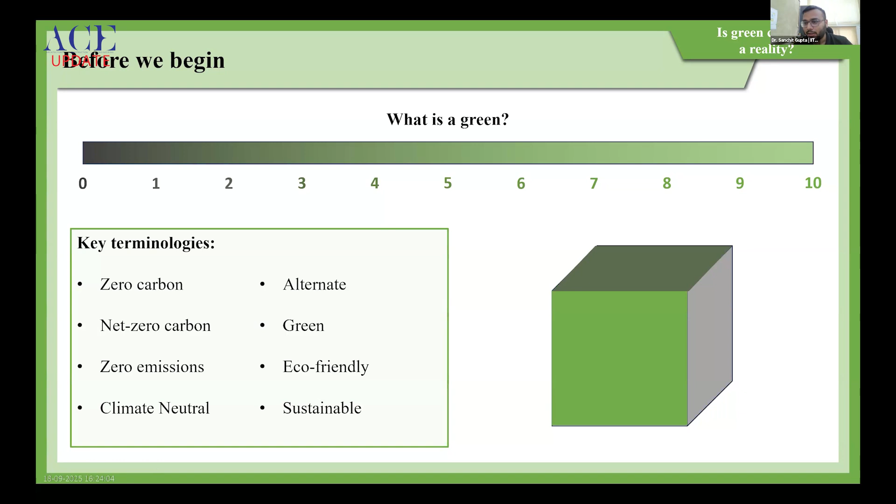comes perspective. If we are looking at a cube, it all depends from which angle we are looking at the solution. AAC block, which sir just talked about, is a sustainable solution when we are talking about walls. But when we are talking about load bearing structures, AAC cannot bear load, so it's not even a viable solution in those applications. So only within the defined application can we talk about whether the material is becoming green or not. About recycled aggregate.

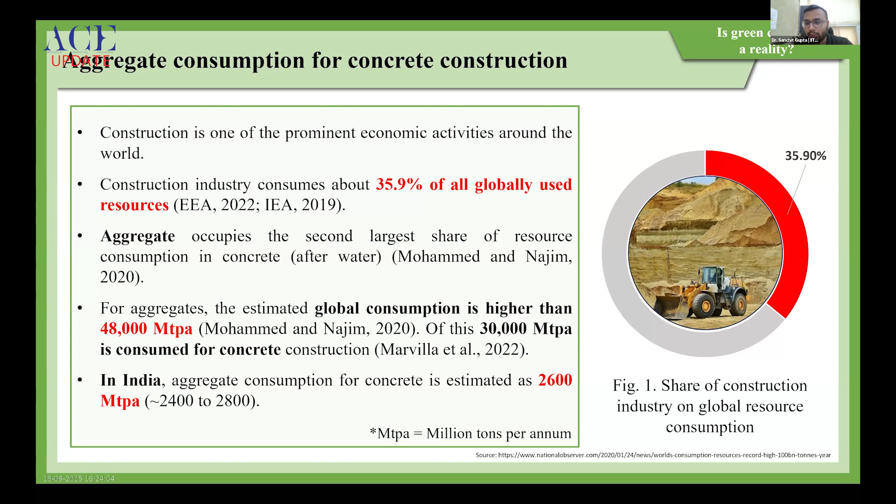When we talk about recycled aggregates, we should understand that construction is one of the highest resource consuming industries, and in this industry itself, aggregate occupies the second largest share of resource consumption globally. In India, the annual consumption of aggregates is estimated at about 2600 million tons. There are a lot of alternatives people talk about, like this can act as an alternate aggregate, that can act as an alternate aggregate. But if we look at their availability, they are not even available in enough quantity to meet half the demand of this industry.

People should understand that there will not be one perfect solution. We have to look at all the solutions, try to optimize whatever is available with us, and explore as many solutions as possible when we are talking about alternate aggregate. Recycled concrete aggregate is one of the best solutions that can meet the largest demand of the country, but it's not the perfect solution as of now.

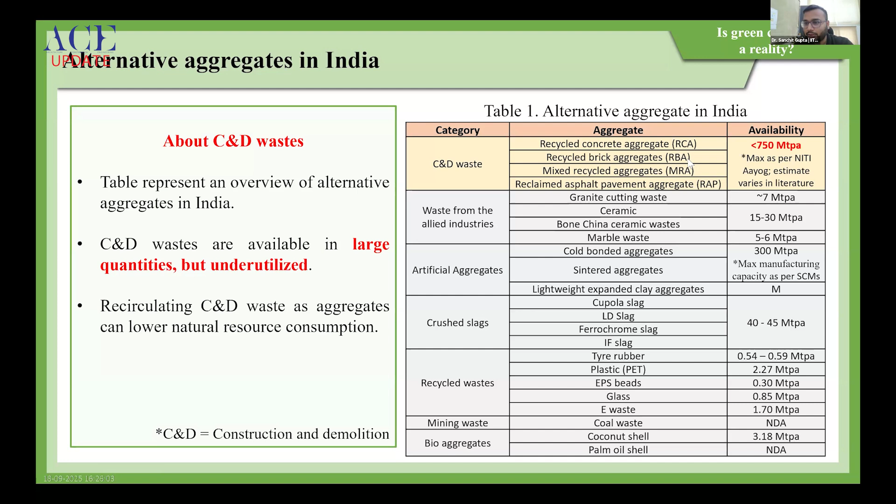Even with recycled aggregate, there's very limited use going on in the industry, and the major problem comes down to how the waste is being managed. The current practice does not include segregation and management practices. As a result, mixed recycled aggregates are generated. There are bricks and other organic impurities present in the recycled waste, which do not give good quality properties. In the global context, when people advocate the use of recycled aggregate, they are mostly talking about recycled concrete aggregates, because this segregated waste typically gives good results, and its use is viable.

So when we are looking at the problem, we should understand how the Indian context is working. In line with the new guidelines from the ministry that will be implemented with effect from April 1st, 2026, I will talk about the two scenarios that we will be facing in India. First is the large builders. They have to segregate and manage this waste. They can talk about recycled concrete aggregate and its proper utilization. A lot of different solutions are available.

But small construction projects and small demolition projects, which cover about 70% of the construction projects in India, do not have any guidelines on what to do. In this case, the builder usually dumps the waste in a mixed form. Now we need two kinds of solution.

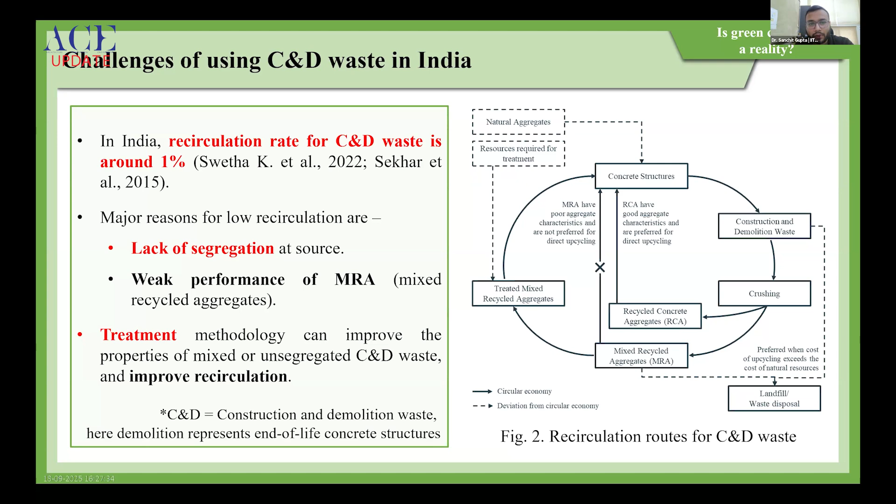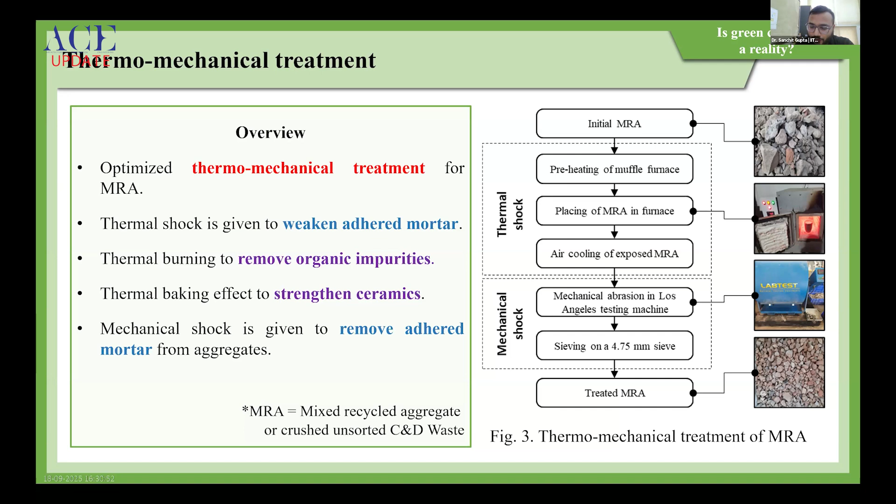So this is an example of thermomechanical treatment. If we bring mixed waste under thermomechanical treatment, heating typically removes your organic impurities. The bricks and other ceramic materials sinter and become hardened, and your typical adhered mortar, which is responsible for degrading the properties of recycled aggregate, gets removed. So we have worked with it and we have achieved very high quality results.

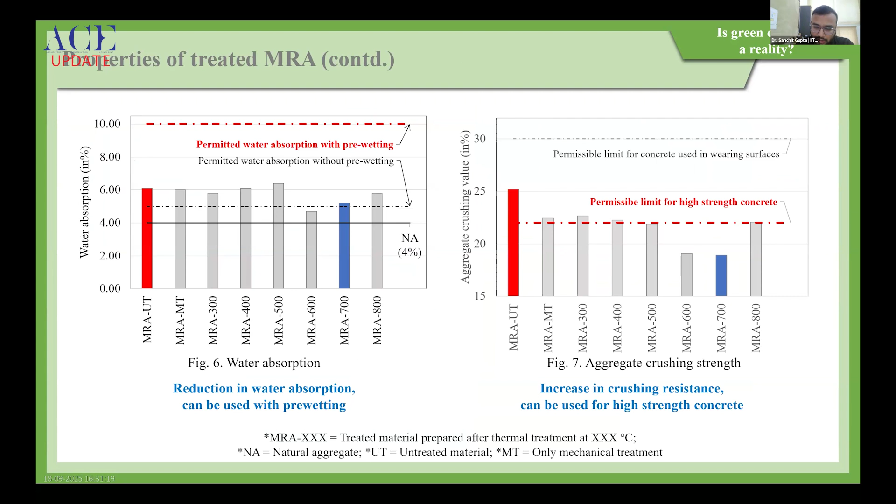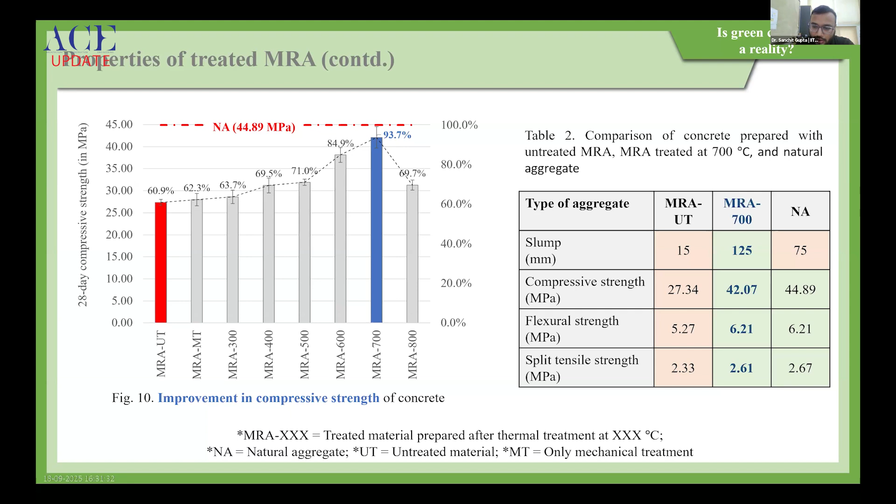If you look at the way the codes are defined, the treated aggregate meets all the standard provisions, which very few treatment processes have achieved as of now. And if we look at the final properties as compared to natural aggregate, the concrete prepared with the treated aggregate performs at a level of 93.7% of natural aggregate, which is very close as compared to how the original waste was performing.

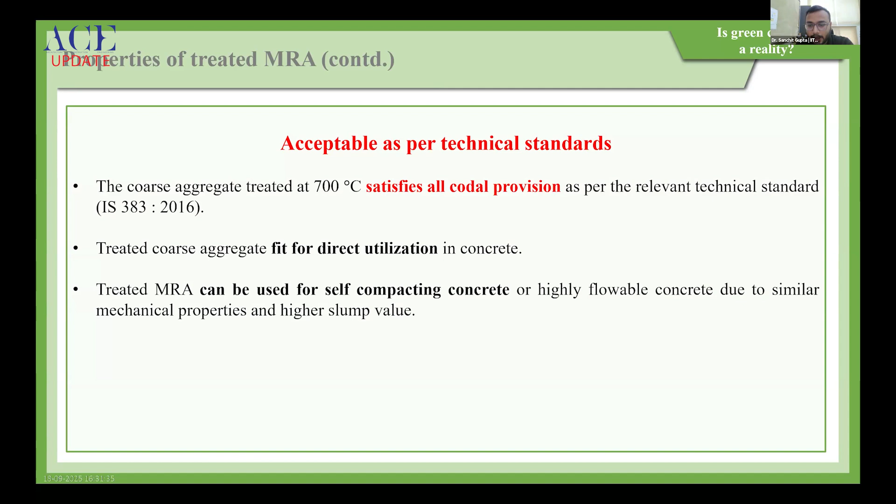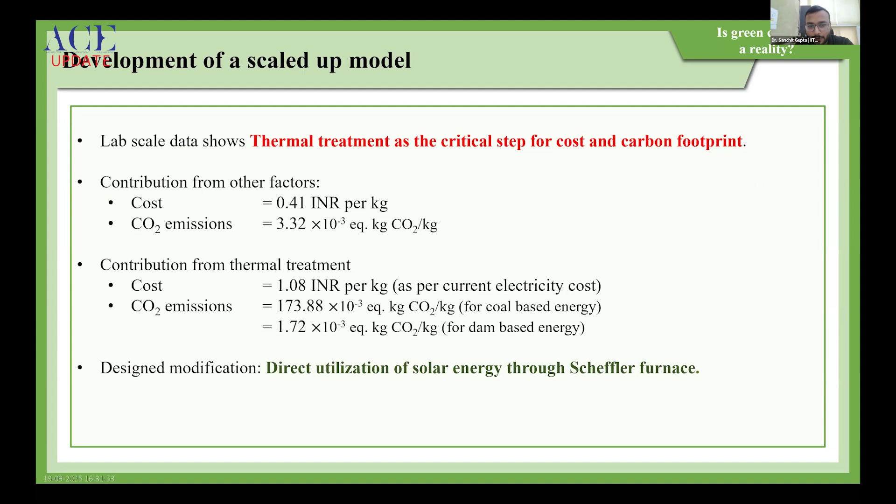These treatment methods themselves sound plausible, that we are achieving a good technical result, but when people are advocating this kind of research, they often miss out on the economics and environmental impact. This happens a lot in India, and if you look at this process itself, the net cost comes out to about 1.49 rupees per kg of aggregate, and carbon emission shoots through the roof. As compared to natural aggregate available in the market, the typical processing costs are way higher with treatment methods.

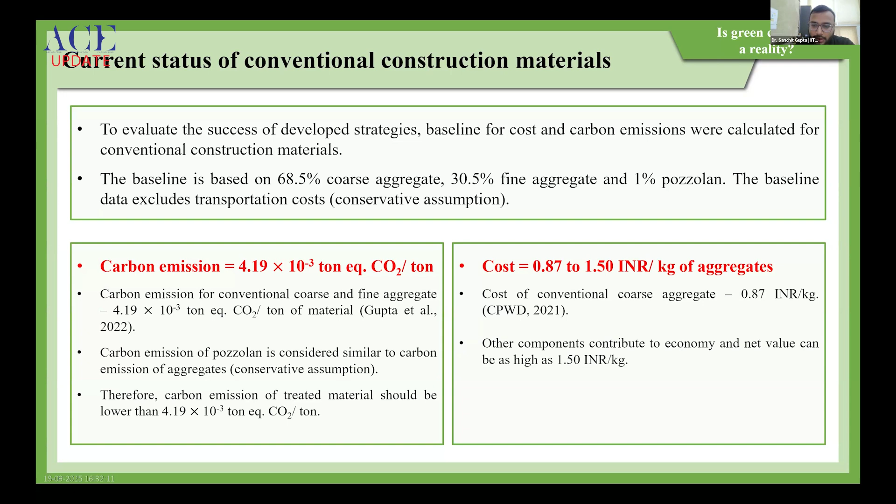Innovation is not just limited to materials. The innovation should also come into the treatment processes. When people look at thermal treatment, they always look at how to heat the material, just burn it and test its properties. But people often forget there are always cross industry innovations. There's one solution, not very recent, it has been in the industry for about 15-16 years. It's called the Scheffler furnace.

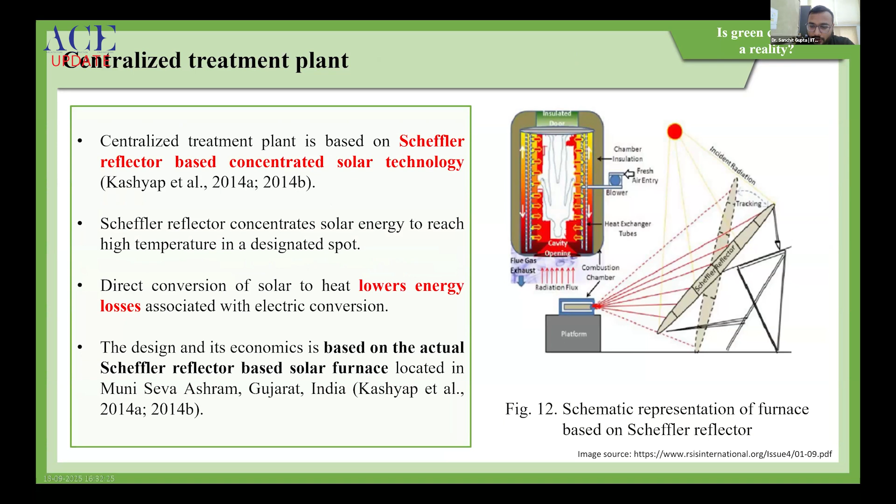This Scheffler furnace directly concentrates solar energy, creates a very high temperature and acts as a furnace. This has already been implemented in India. It's not a very new technology, but it's not known to the industry, so its cross industry applications are still missing. If we use this kind of technology, our net carbon emission becomes lower than natural aggregate, and the net cost also gets lower than natural aggregate.

These types of innovations are needed to drive these green changes and make recycled aggregate utilization more sustainable. I am telling you, this kind of solution is not there at 100%. This is just a greener effort as a replacement for your natural aggregate and recycled aggregate. But due to limited availability, this solution can further be improved, and this is just a relative shift.